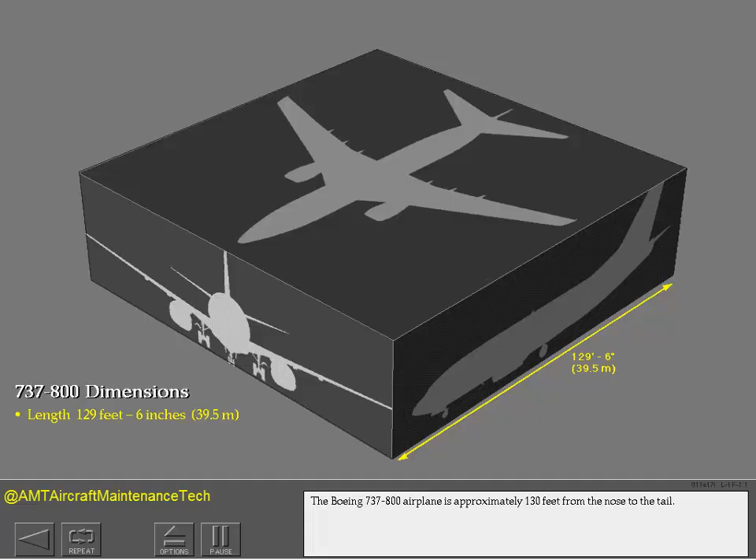The Boeing 737-800 airplane is approximately 130 feet from the nose to the tail. It is more than 41 feet to the top of the vertical stabilizer, and it has a wingspan of almost 113 feet.

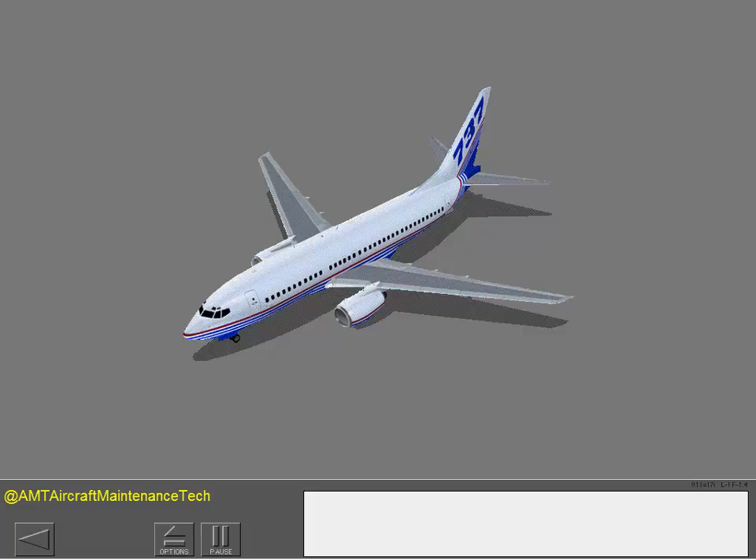The minimum width to turn the airplane is approximately 77 feet.

The weight limits for the 737 are different for each airline. There are limits for the maximum zero fuel weight, the maximum taxi weight, the maximum takeoff weight, and the maximum landing weight.

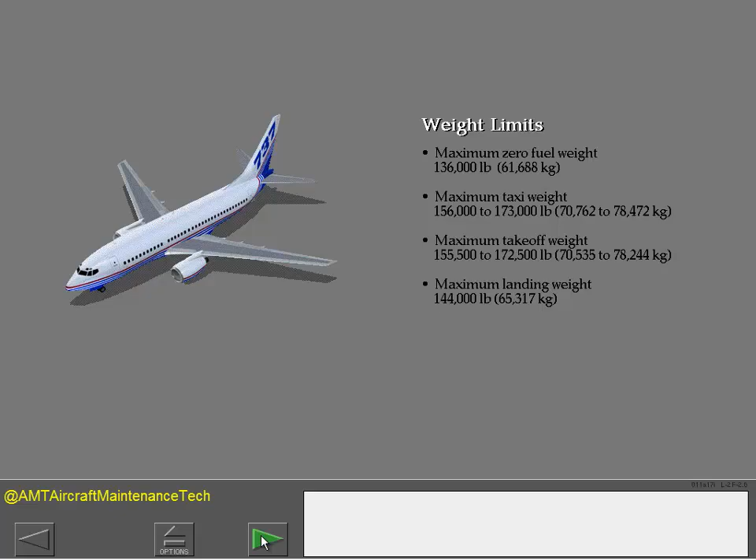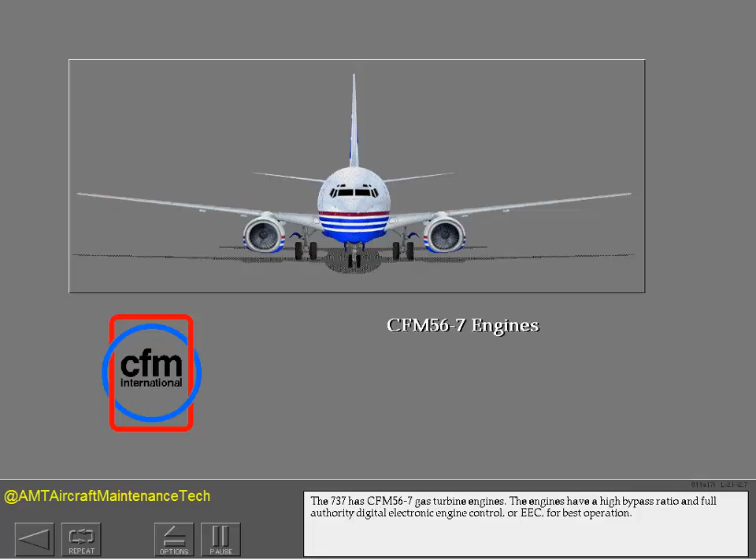The 737 has CFM56-7 gas turbine engines. The engines have a high bypass ratio and full authority digital electronic engine control, or EEC, for best operation.

The engines can be set to supply between 22,000 and 26,400 pounds of thrust.

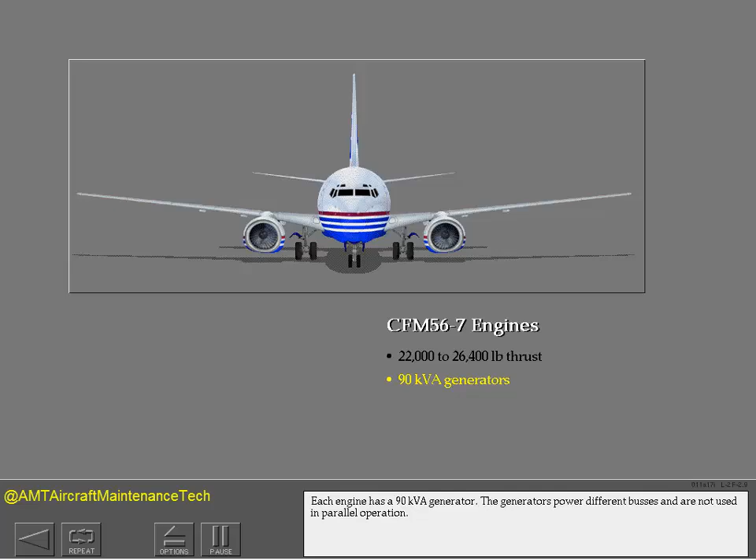Each engine has a 90 kVA generator. The generators power different buses and are not used in parallel operation.

The engine fan diameter is 61 inches. The engine nacelle has a flat bottom to give sufficient ground clearance.

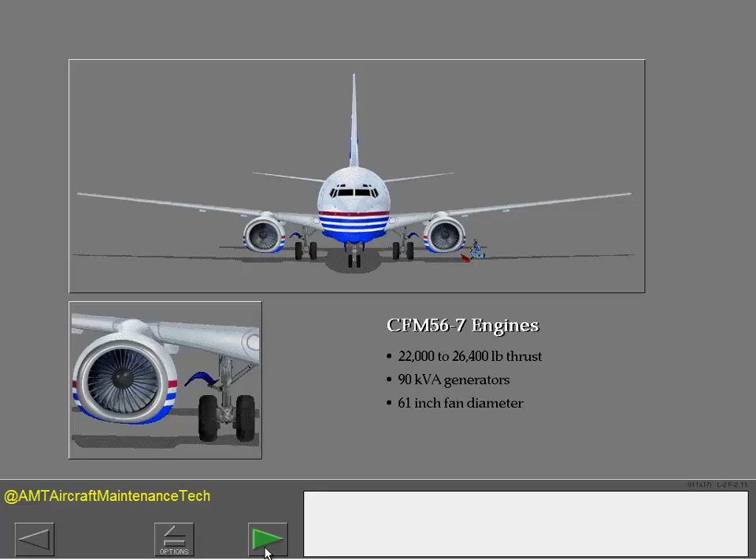The 737 can fly short to medium-range flights. Versions of the 737-800 can fly 2,900 nautical miles with a full passenger load.

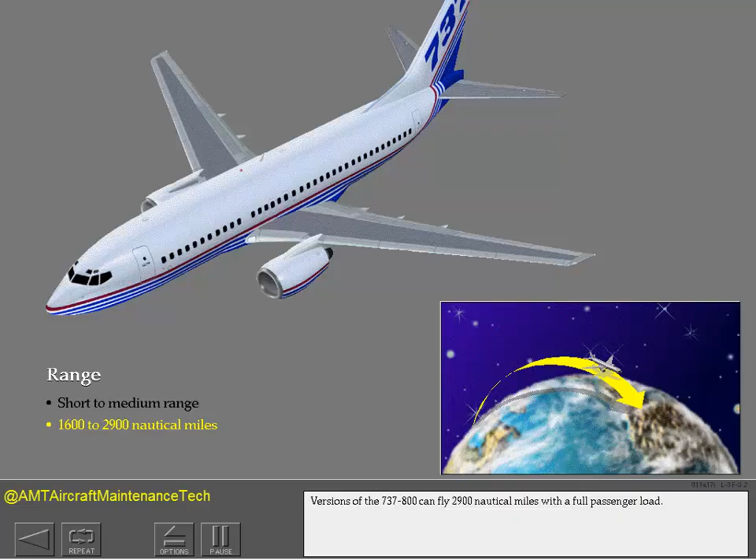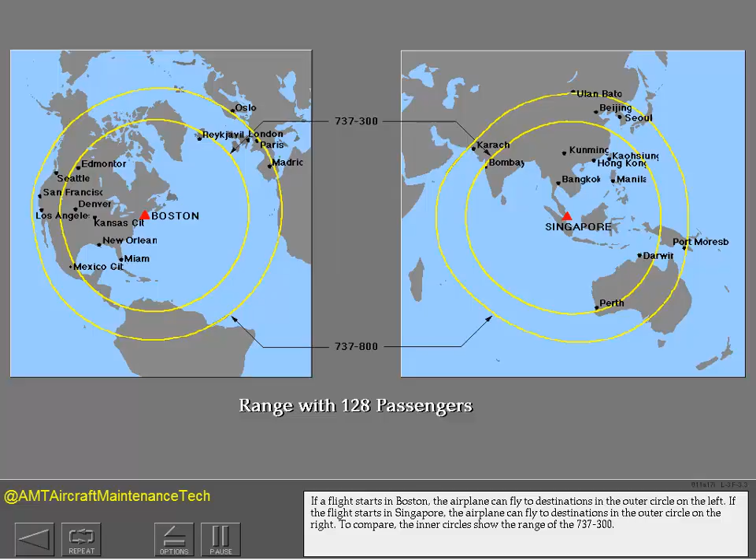The maximum altitude is 41,000 feet, and the maximum operating speed is 0.82 Mach.

The 737 flight controls, normally operated by the hydraulic systems, control pitch, roll, and yaw.

The trailing edge flaps, the leading edge flaps, and the leading edge slats normally use the hydraulic systems to operate.

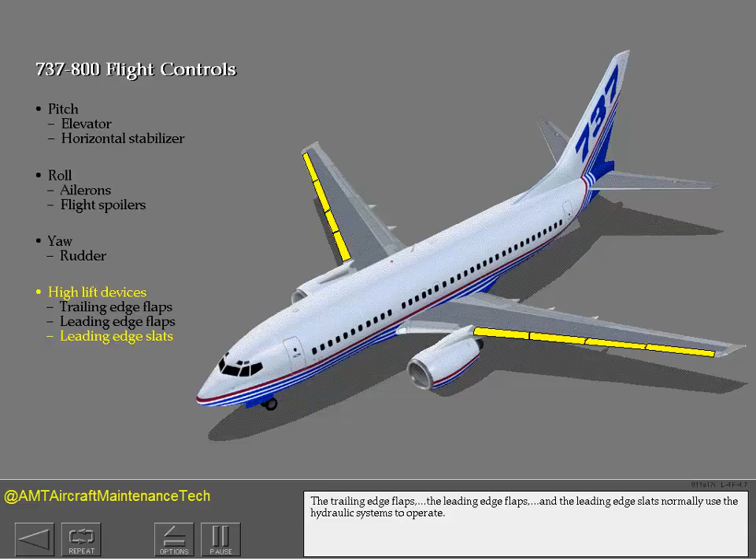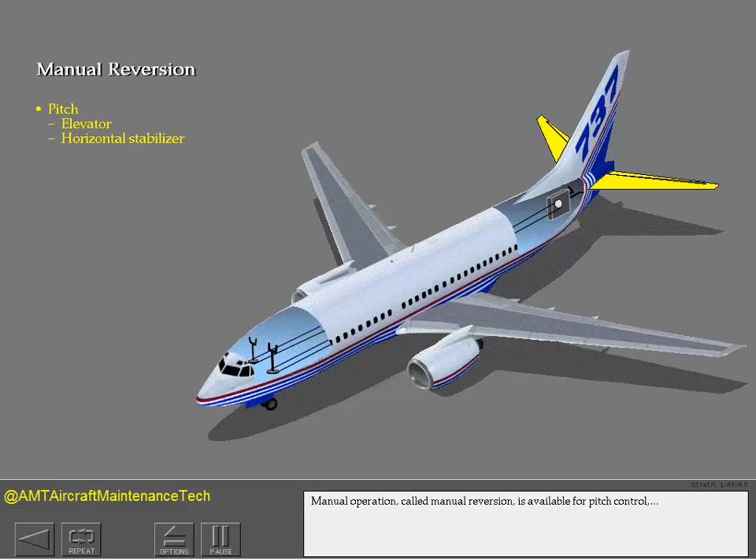Manual operation called manual reversion is available for pitch control and roll control.

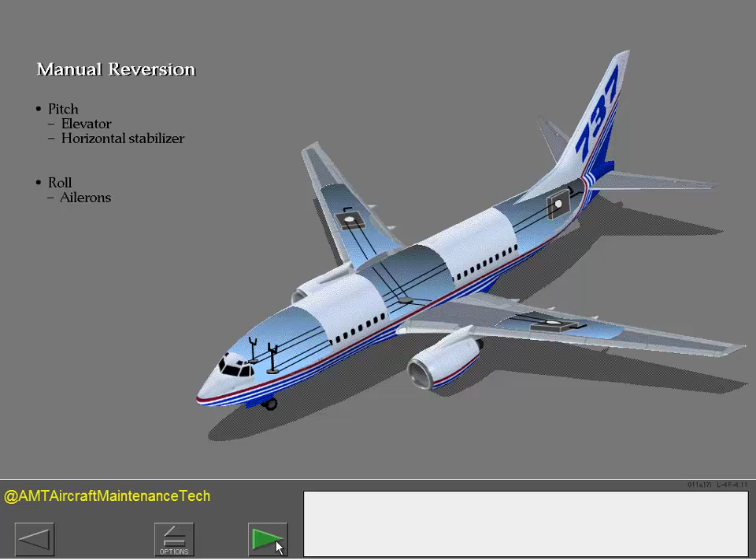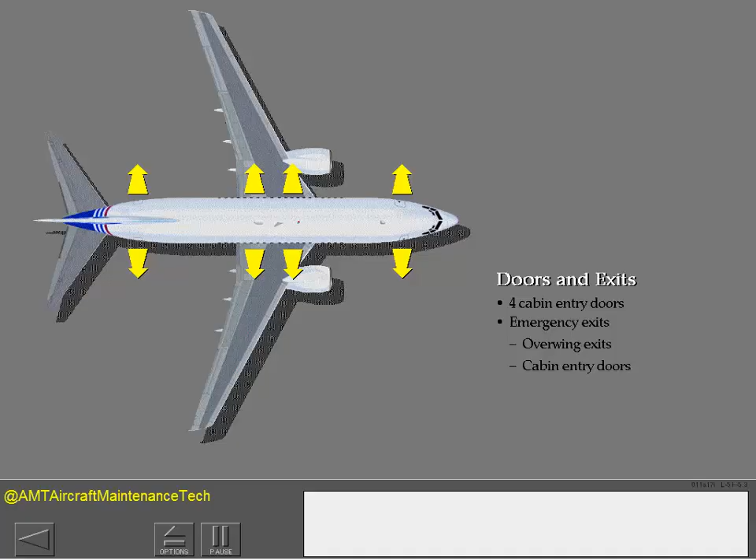There are 4 cabin entry doors, 2 on each side of the fuselage. There are 4 overwing emergency exits. All cabin entry doors are emergency exits also. There are 2 cargo doors, 1 forward and 1 aft.

There are special coatings on the pilot's windshields to help repel rain.

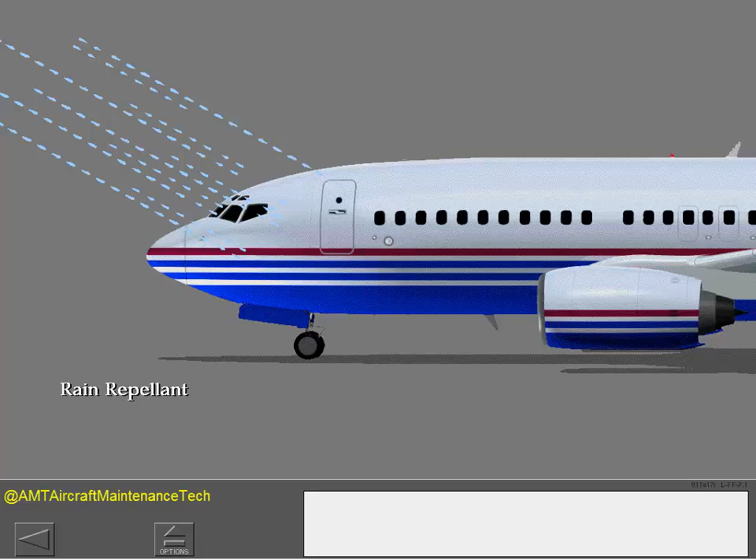An APU in the tail supplies electrical power on the ground and in flight at all altitudes. The APU also supplies bleed air on the ground and up to 17,000 feet. Electrical power plus bleed air is available up to 10,000 feet.

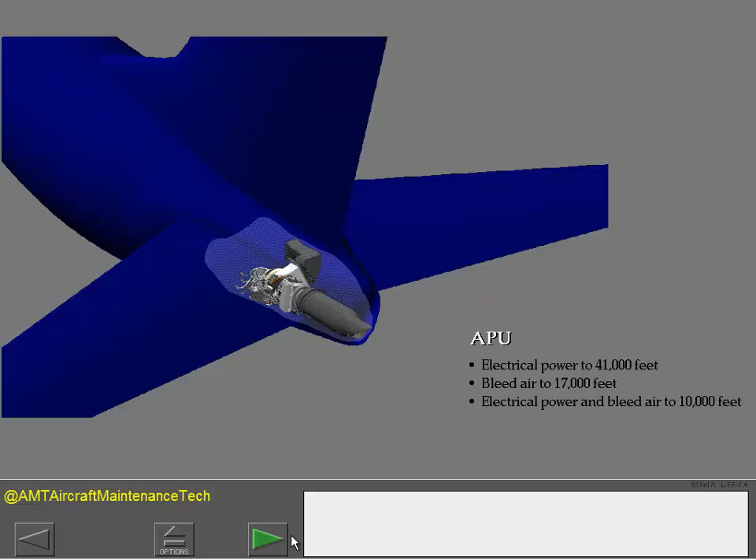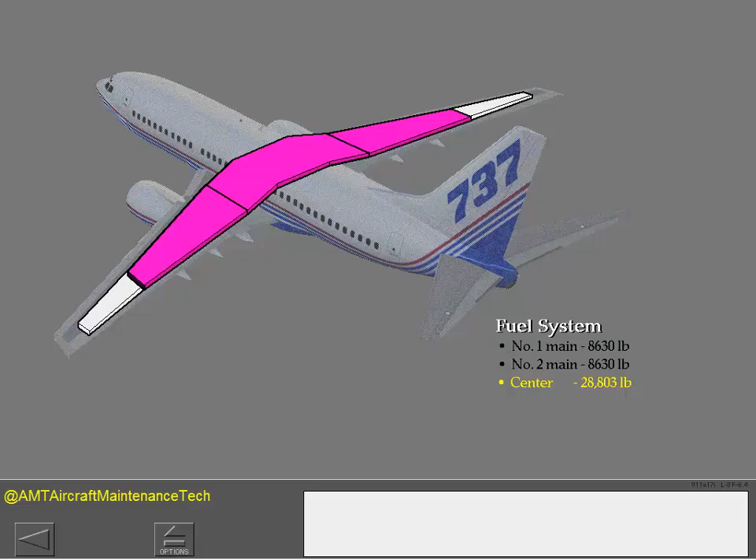The fuel system has 3 tanks: one center tank and 2 main wing tanks. The total fuel capacity is more than 45,000 pounds, or 20,500 kilograms.

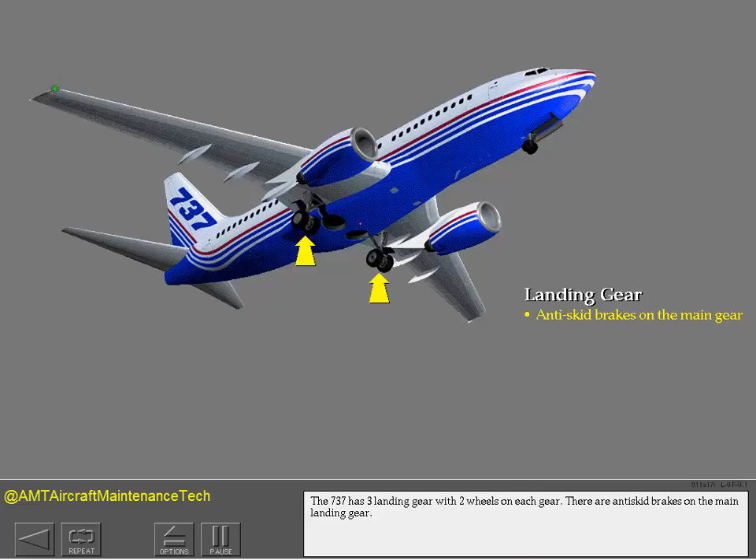The 737 has 3 landing gear with 2 wheels on each gear. There are anti-skid brakes on the main landing gear. The nose gear can be steered with the nose wheel steering wheel or with the rudder pedals.

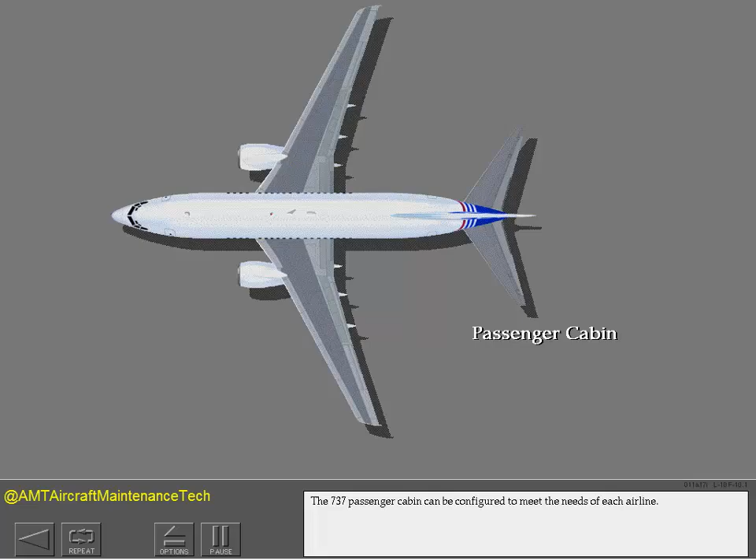The 737 passenger cabin can be configured to meet the needs of each airline. A maximum of 184 passengers can be accommodated in an all-tourist configuration. In a mixed-class configuration, the airplane seats 160 people.

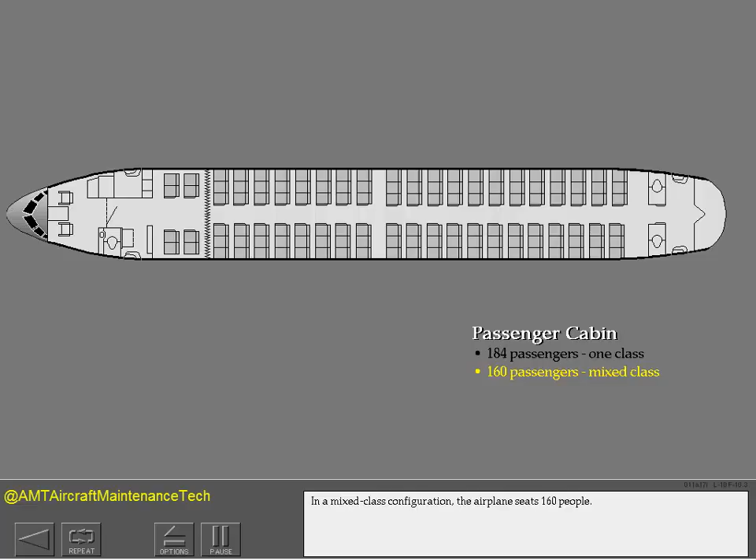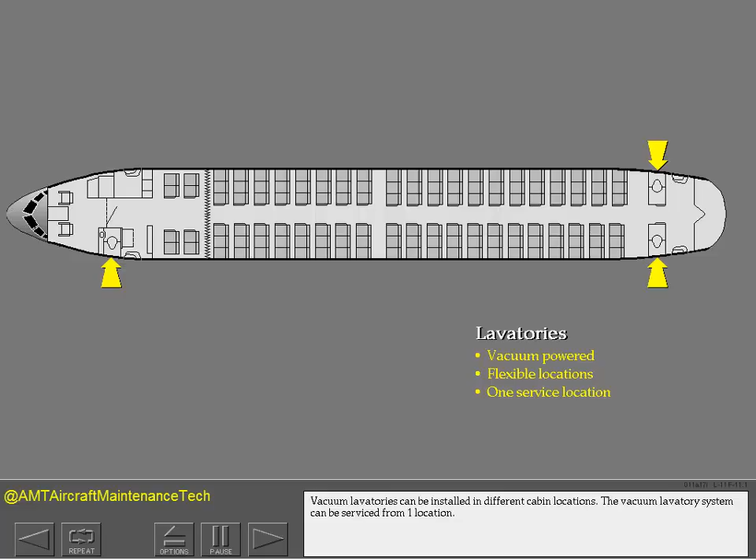Vacuum lavatories can be installed in different cabin locations, and the vacuum lavatory system can be serviced from one location. Galleys can also be put in different cabin locations.

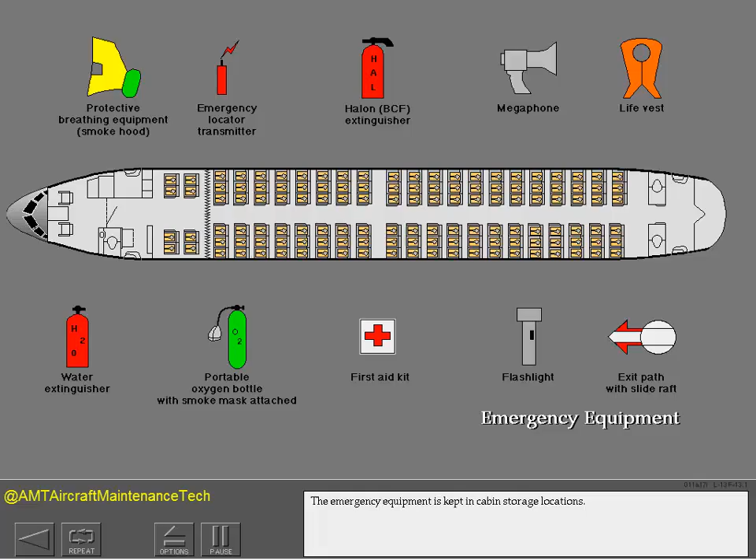The emergency equipment is kept in cabin storage locations. Each passenger door has an emergency slide.

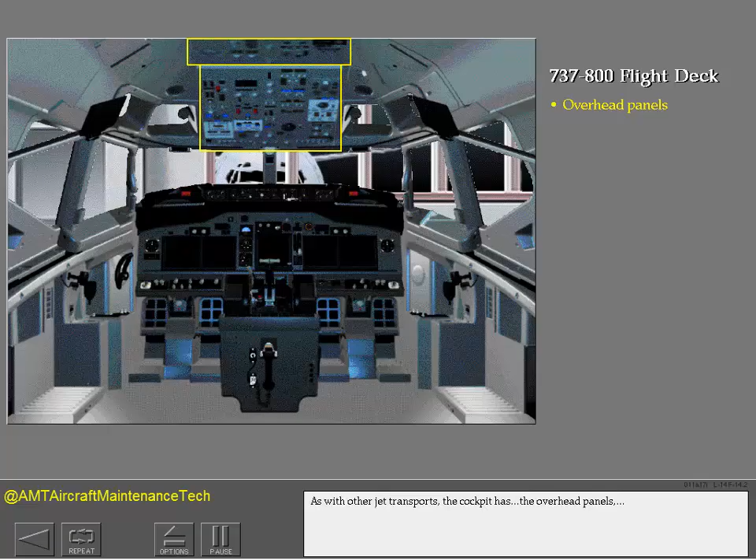As with other jet transports, the cockpit has the overhead panels, the glare shield, the instrument panels, the center instrument panel, the forward electronic panel, the control stand, and the aft electronic panel.

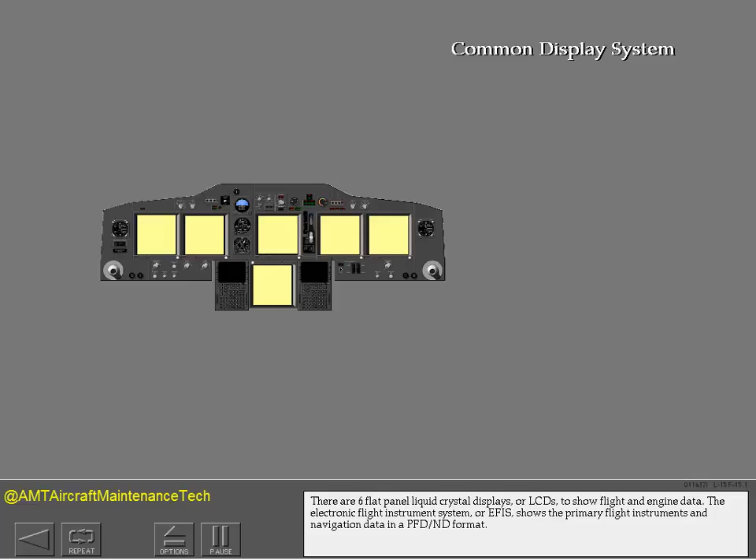There are 6 flat-panel liquid crystal displays, or LCDs, to show flight and engine data. The Electronic Flight Instrument System, or EFIS, shows the primary flight instruments and navigation data in a PFD-ND format.

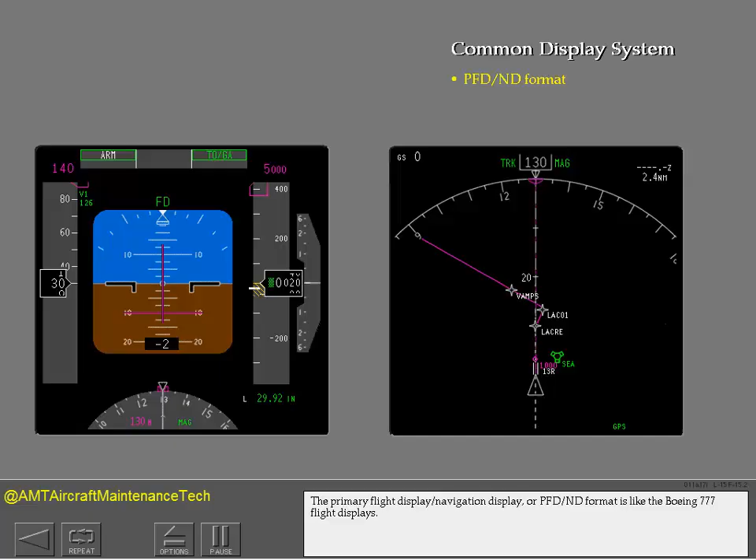The Primary Flight Display Navigation Display, or PFD-ND format, is like the Boeing 777 flight displays. Engine information is divided between the upper and lower displays.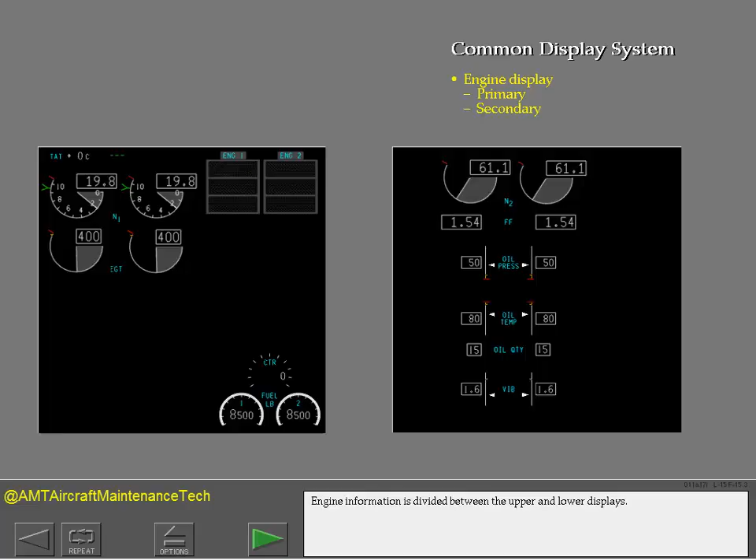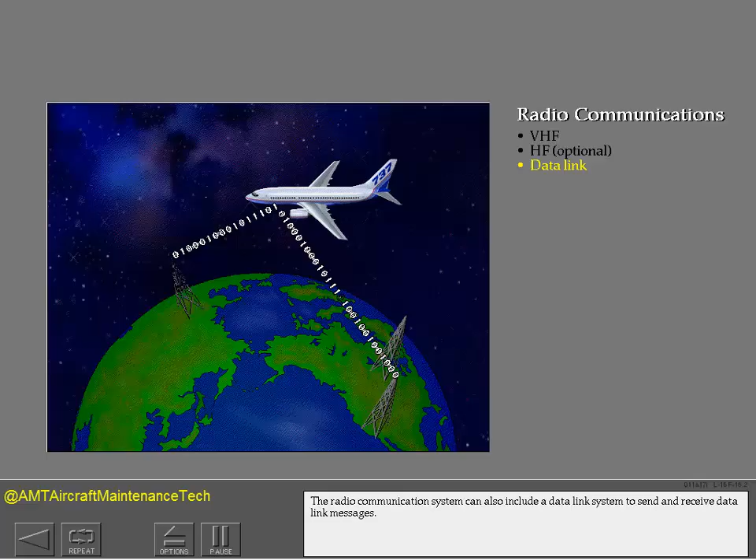The radio communication system includes very high-frequency radios. There can also be high-frequency radios. The radio communication system can also include a data link system to send and receive data link messages.

The Flight Data Recorder system records data for the most recent 25 hours of operation.